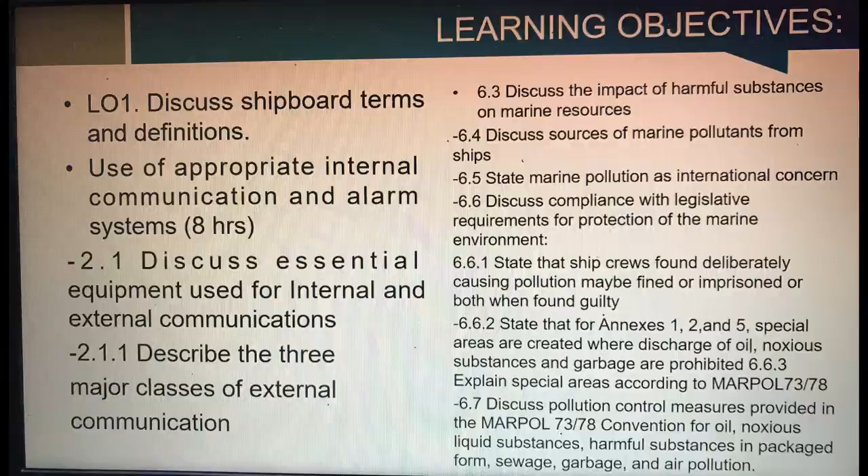Ship communication. First, what is communication? From Latin, communicare, meaning to share. Better sourcing needed: it is the act of developing meaning among entities or groups through the use of sufficiently mutually understood signs, symbols, and semiotic conventions.

In communication, it is where you share the message you decode, or the message you want to say, to the person you talk to.

Next, what is the process of communication? First, the formation of communicative motivation or reason. This is where you form your message into a word.

Then, message composition: further internal or technical elaboration on what exactly to express. This is what you form your word into a sentence.

Next, message encoding, for example into digital data, written text, speech, pictures, gestures, and so on.

Next is the transmission: transmission of the encoded message as a sequence of signals using a specific channel or medium. This is where you transmit the message, like giving it to the person you talk to. You transmit it to them.

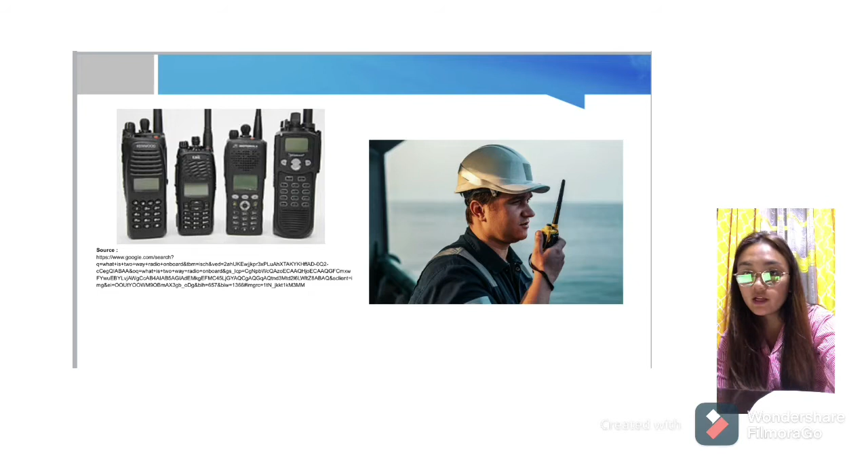Public address is applicable for all kinds of vessels, offshore, port, company, and schools as equipment for command communication, shout-out, general alarm, and entertainment, etc. For public address, when we say public, there are so many people around you. And address is you telling the people around you or surrounded by you the message you want to tell them. The public address system shall be a loudspeaker installation enabling the broadcast of messages into all spaces where crew members or passengers, or both, are normally present, and to muster stations.

It shall allow for the broadcast of messages from the navigation bridge and such other places on board the ship as the administration deems necessary, shall be installed with regard to acoustically marginal conditions and not require any actions from the addressee, and shall be protected against unauthorized use.

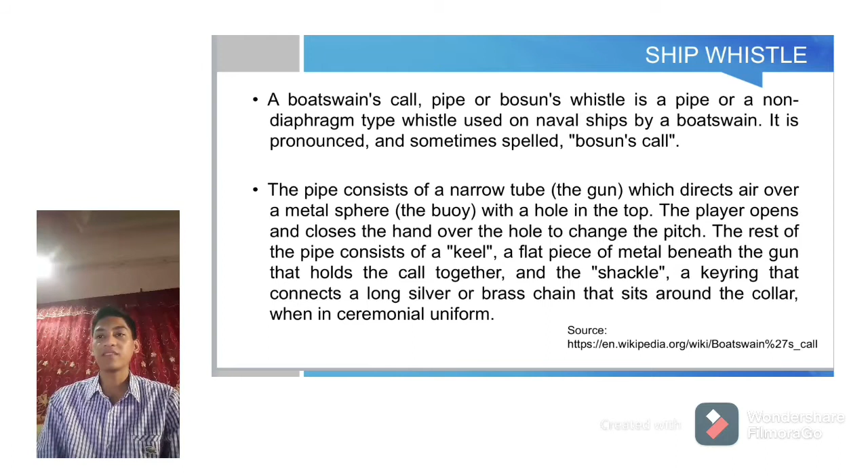Ship whistle is a boatswain's call, pipe or bosun's whistle, sometimes spelled as bosun's call. You can find this whistle at the front of the ship or vessel. Sometimes in the bridge, there's a pipe that the officers of the watch or the captains use, and they are the ones who sound the alarm using the pipe tube.

Aldis lamp or signal lamp, sometimes called a Morse lamp. In this equipment, they use Morse code to give messages, using the shutter of the mirror through light, and they transmit the message to the other vessel so that we do not misunderstand. Sometimes because of the radio call we can misunderstand the person, but with this Aldis lamp you cannot misunderstand the person as long as you know the Morse code message.

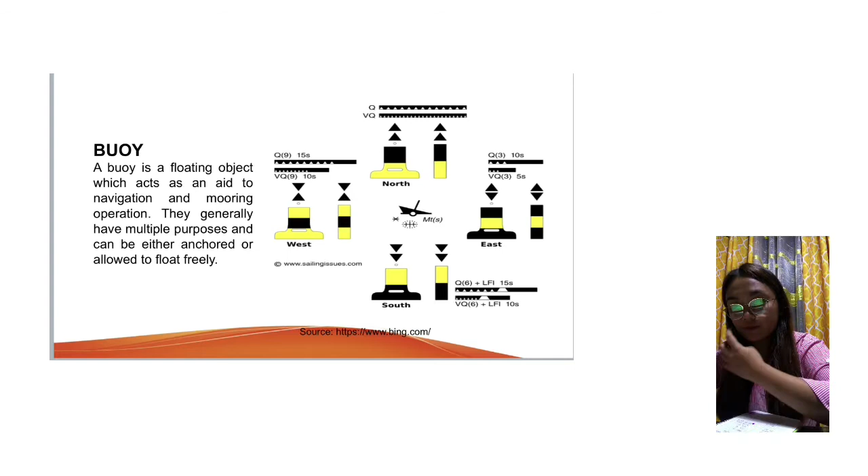Buoy. A buoy is a floating object which acts as an aid to navigation and mooring operations. They generally have multiple purposes and can be either anchored or allowed to float freely. This aid to navigation is very important because it gives us a sign of where we are or where we are going. It is also a warning sign, like a signboard, if an area is restricted for navigation. A buoy can be anchored or floating freely, and sometimes it is both anchored and floating freely at the same time - floating but not moving away from that place.

Course, the direction or planned path on which the vessel is proceeding. This course is where you are going, heading to your destination. It is the road map that you are going to navigate.

Correction. An error has been made in this transmission; the corrected version is in the correction. It is corrected by the captain, the officer of the watch, or the officer responsible for the situation. Correction is for them to be updated in terms of the chart, and in terms of correction, they have what they call notices to mariners.

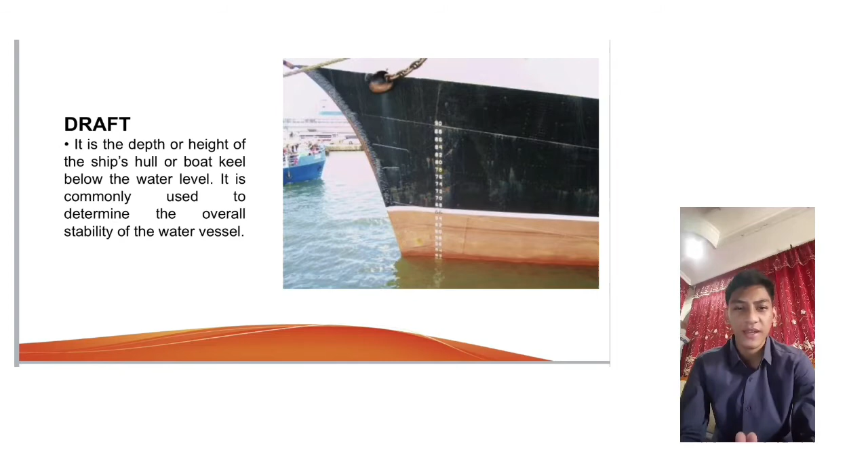Draft. It is the depth or height of the ship's hull or boat keel below the water level. It is commonly used to determine the overall stability of the vessel. It is for the officers responsible for the vessel to see what is the depth or height of the water.

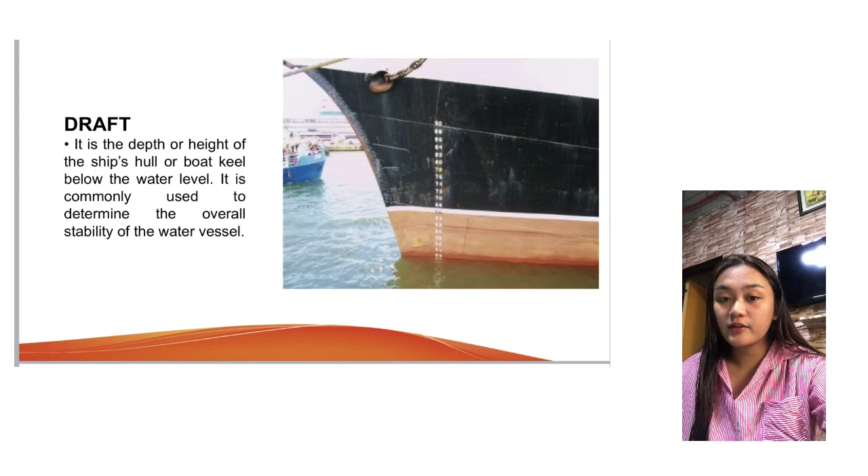Deep water route. A route within defined limits which has been accurately surveyed for clearance of sea bottom and submerged articles. Deep water route is important if you are navigating a ship, to prevent traffic or collision. It is a way that has deep water. For the deep water route, you can see it also on the navigating map - as an officer, you can check the map to see where the deep water route is.

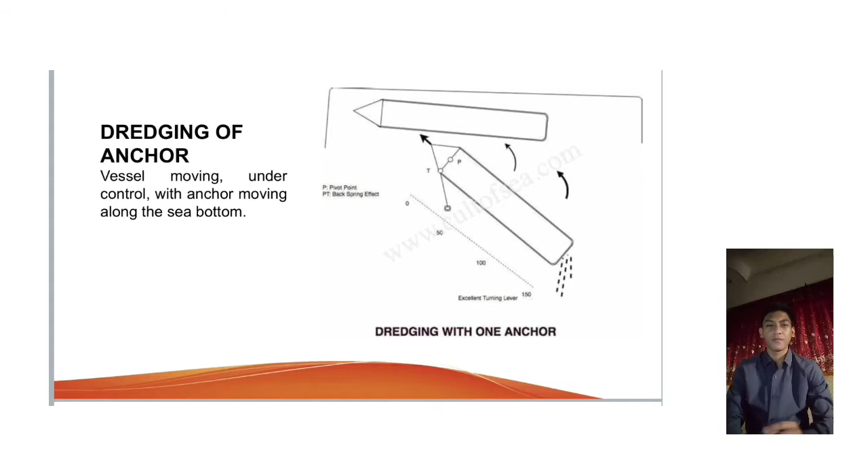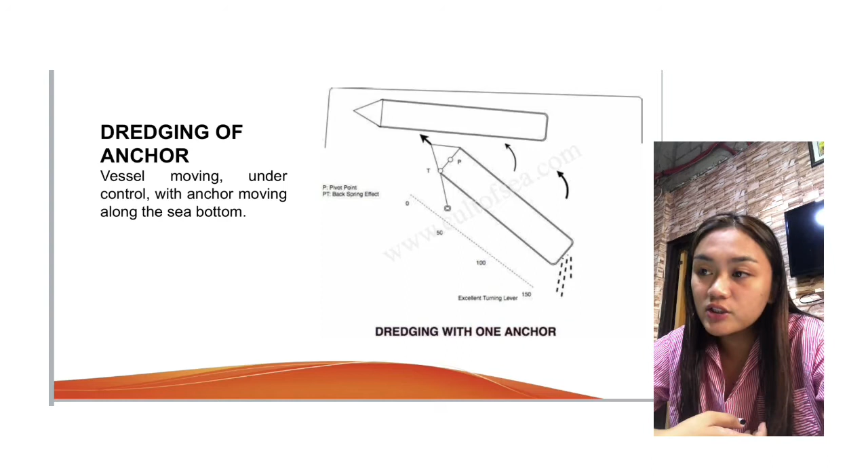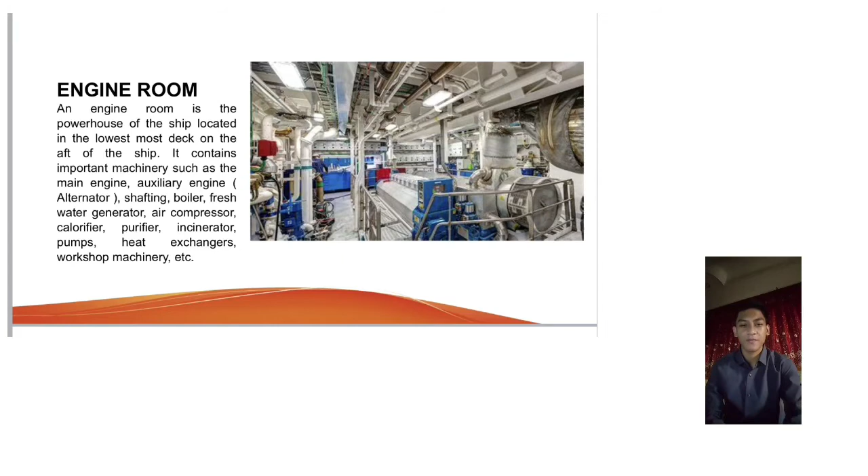Engine room. An engine room is the powerhouse of the ship located in the lowest-most deck on the aft of the ship. It contains important machinery such as the main engine, auxiliary engine or alternator, shafting, boiler, freshwater generator, air compressor, calorifier, purifier, incinerator, pumps, heat exchangers, workshop machinery, and etc. The engine room is very important for the vessel because it is where the vessel works and how the vessel works.

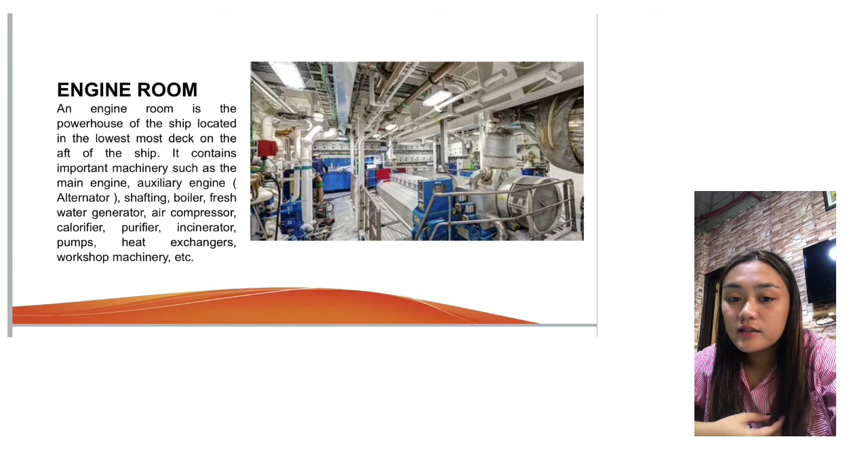ETD, or estimated time of departure, is the expected date of ship departure from port. ETA, or estimated time of arrival, is the expected date of the ship's entry into the port.

Flare, an emergency equipment used to signal other ships or nearby planes for rescue or help. This equipment is so important when it comes to search and rescue operations. You can easily notify the ships or the rescuer using the flare.

Fouled propeller: a line, wire, net, etc. is wound around the propeller. This situation may cause harm on the ship or may cause accident on the crew on it.

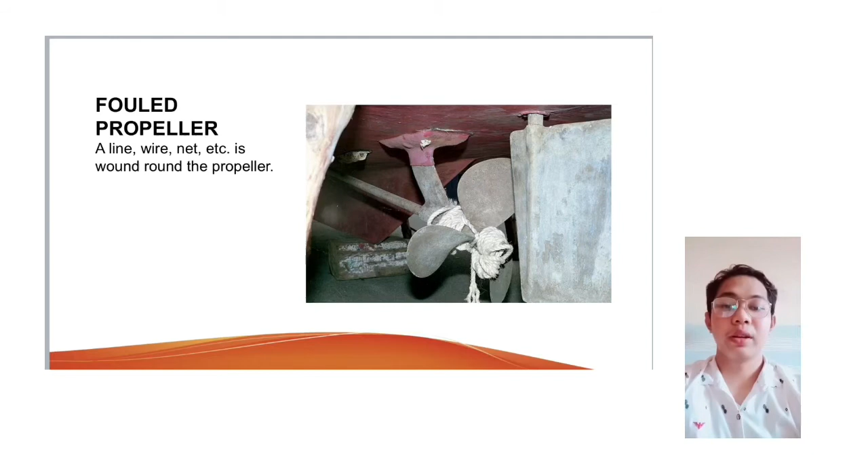Fouled anchor: the anchor has its own cable twisted around it or has fouled on an obstruction. Same as fouled propeller, it is dangerous because it may also cause an accident, so always check your anchor and propeller.

Fairway speed: the mandatory speed in a fairway. We have rules at sea. When we are in a fairway, we must obey the given speed of a vessel.

Grounding: a phenomenon when a ship or boat's keel touches the ground or seabed. When we encounter a grounding situation, we must be alert because it may cause negative results like flooding that can cause your death.

GMDSS, or Global Maritime Distress and Safety System, is an automated ship-to-shore system using satellites and digital selective calling technology. This is very important when it comes to search and rescue operations because this equipment can send distress signals to shore and can locate your location.

Helmsman: the person responsible for steering the ship or a large boat is called the helmsman. The helmsman is one of the members of the bridge team and is very important when navigating the ship or in a navigational operation.

Keel: the bottommost central part of the ship or boat hull on which the entire structure of the ship is built upon. The keel is very important because it prevents the boat or ship from being blown sideways by the wind.

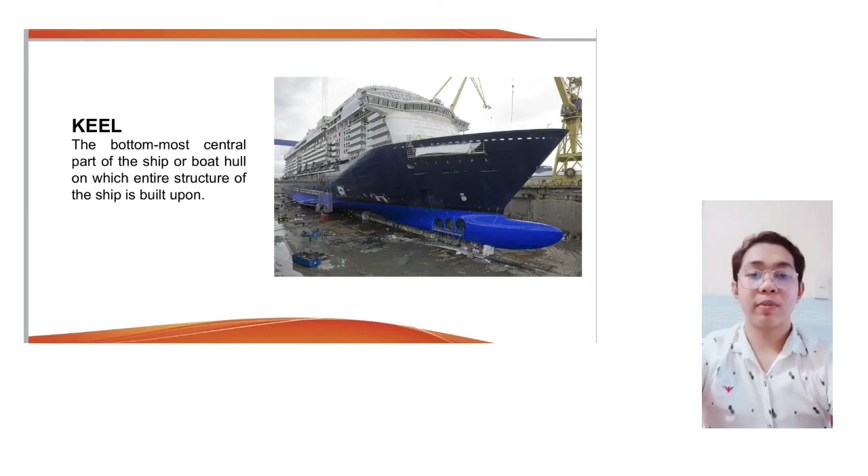Capsize: a situation in which a ship or boat rolls over or tilts too far, exposing the keel. In simple words, your boat or ship is said to capsize when it is turned upside down. Much larger ships and boats break apart and sink under this condition, so many times it's also referred to as sinking of a ship.

Capsizing or keeling over occurs when a boat or ship is turned on its side or is upside down in the water. If a capsized vessel has enough flotation to prevent sinking, it may recover on its own in changing conditions or through mechanical work if it is not stable while inverted.

Sextant: a navigation instrument used by a seaman to locate their vessel's position at sea, based on the position of the sun, stars, and moon in the sky. In old times, it was used as the only means of navigation at sea, but nowadays it's used only as a backup navigation tool or in an emergency.

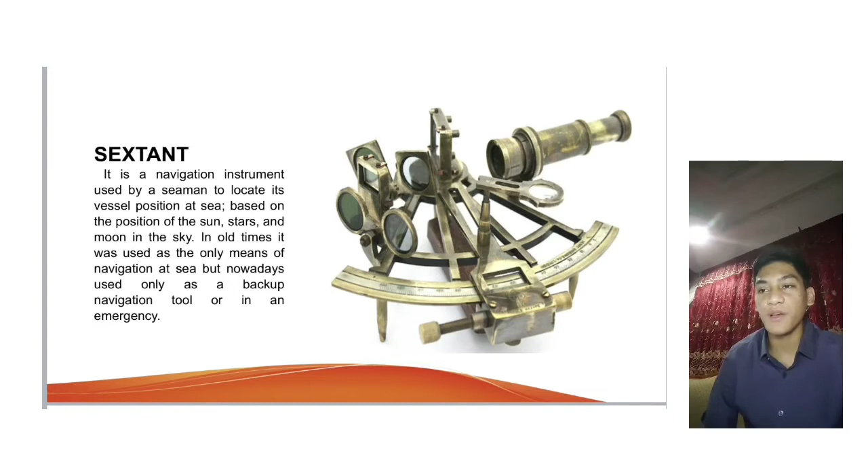EPIRB stands for Emergency Position Indicating Radio Beacon, which sends radio signals once activated to alert and inform ships, satellites, and airplanes of the ship or boat's position. It is much like an emergency location beacon which will inform search parties of your actual position. So an EPIRB is a safety device carried by a vessel to alert search and rescue services, allowing them to quickly locate you in the event of an emergency. When activated, it transmits a coded message on the 406 MHz distress frequency, which is monitored by COSPAS-SARSAT, a satellite system.

Two-way route: a route within defined limits inside which two-way traffic is established, aimed at providing safe passage of ships through waters where navigation is difficult or dangerous.

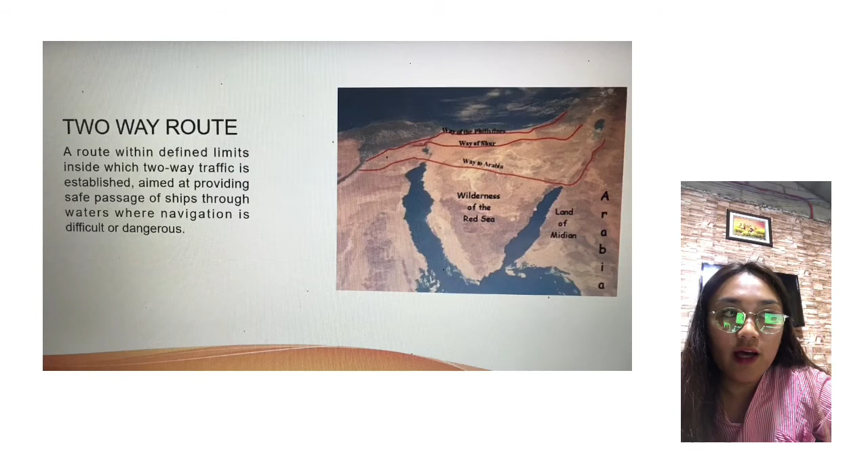A two-way route is similar on land. We have this on the right side and on the left. We have four lanes, for outgoing and ingoing traffic. On the right side is for the tricycles and on the left side is for the four-wheeled vehicles. Same at sea, we have a two-way route, which is on the right side; this is the safest for emergencies. And if the left side has a situation that can cause harm to the vessel, we use the right side to move away.

Vessel leaving, a vessel which is in the process of leaving a berth or anchorage. Vessel leaving is similar to estimated time of departure, because in vessel leaving, it's the vessel that is leaving, and for estimated time of departure, this is the expected time of their leaving.

Vessel leaving is not only for the port but also when the vessel is at anchorage. Vessel outward, a vessel which is proceeding from harbor or anchorage to seawards.

If we have leaving, we also have arriving. It's like ETA, estimated time of arrival, which is when they arrive at port.

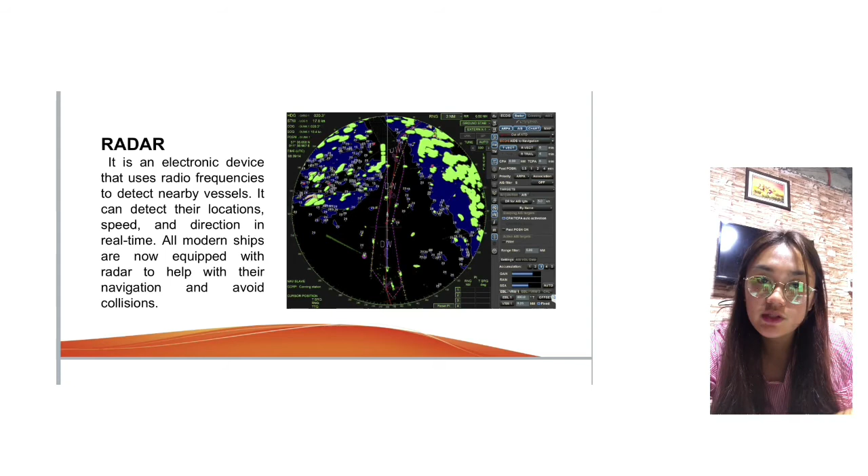Environmental protection, basic environmental procedures. Our learning objective for this session is knowing the impact of maritime pollution on the environment, knowing what harmful substances are according to MARPOL, the impact of harmful substances on marine resources, and discussing the source of marine pollution from ships.

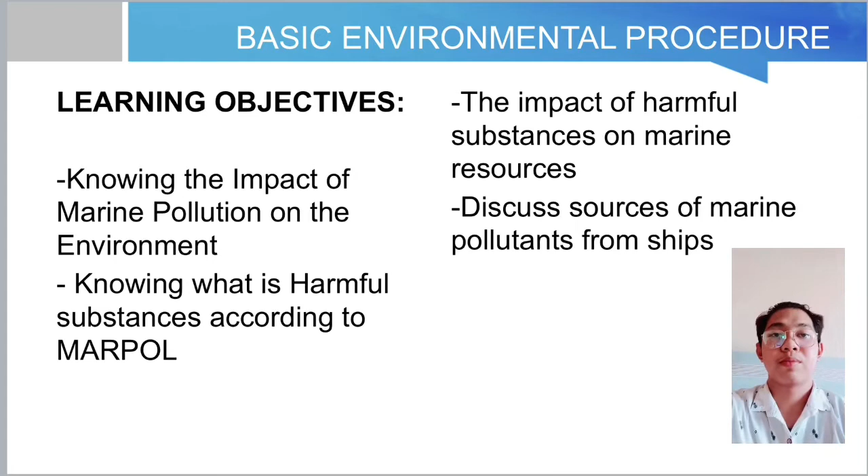What is marine pollution? Marine pollution is a combination of chemicals and trash, most of which comes from land sources and is washed or blown into the ocean. As a responsible seafarer, we must remind others not to throw their garbage into the sea because it may harm the marine environment. Wildlife entanglement.

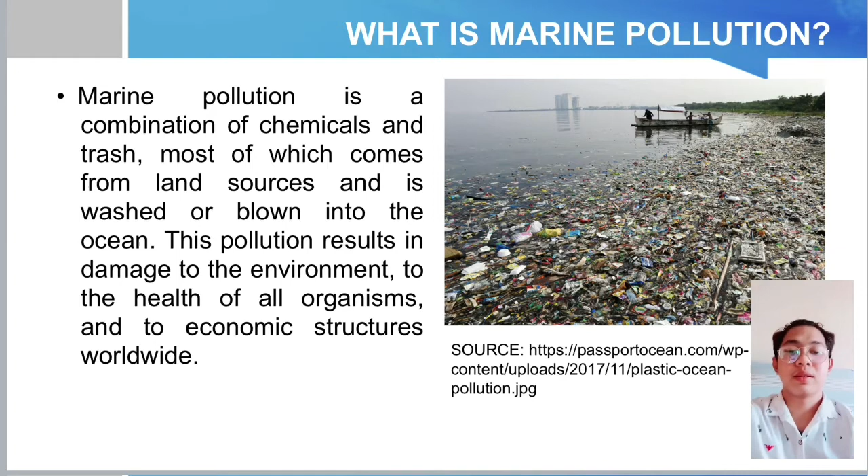Marine wildlife death by entanglement is a silent killer. Thousands of miles and literally tons of derelict rope and fishing nets quietly snare unsuspecting marine animals on a global scale every day. Being a fisherman, we must avoid losing our equipment like nets because it may also harm fish and marine animals.

So we must prevent this from happening and be responsible. Many marine animals are dying because of this. It is estimated that over 100,000 marine animals such as turtles, dolphins, seals, and whales die each year from ingesting or becoming entangled in plastic debris.

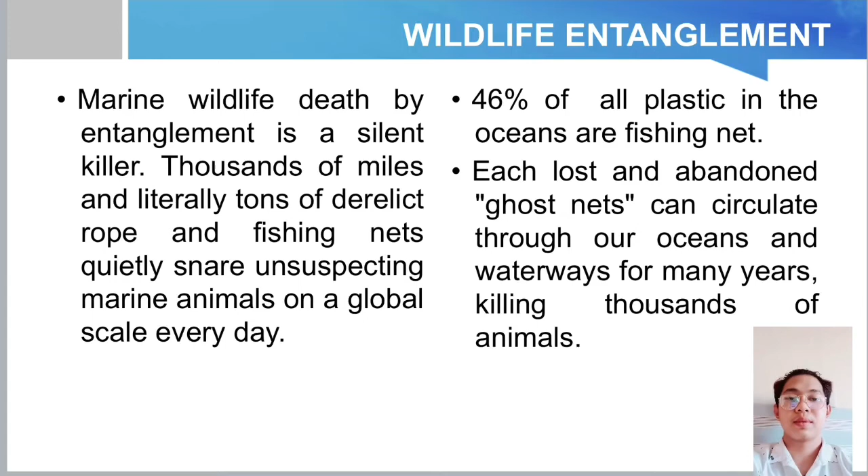Wildlife ingestion: 52% of all sea turtles worldwide have eaten plastic. By 2050, 99% of seabirds are likely to have ingested plastic. For years, many people have been dumping their garbage in the ocean, which is not good because many marine animals can eat the garbage, or the plastic in the garbage can affect the marine environment.

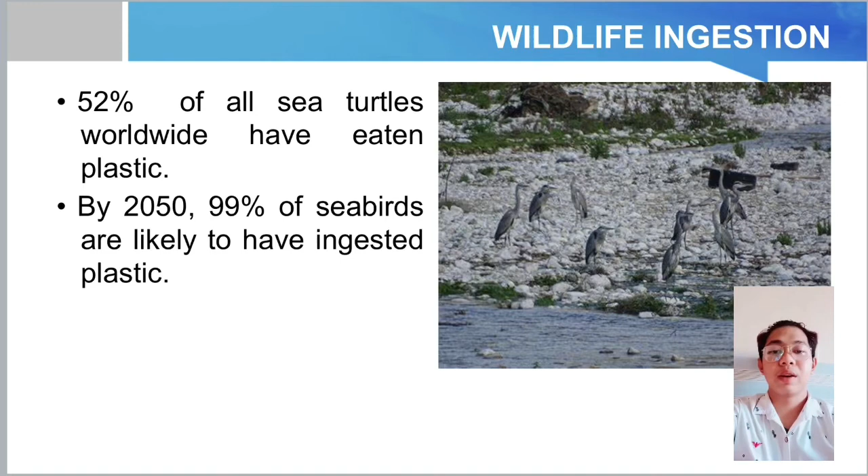Economic loss: vessel damage and navigational hazard. As a responsible seafarer and officer on the watch, we must avoid collisions, because when a collision happens, our vessel may be drowned in the ocean, and it may also cause hazard in the marine environment.

Economic loss in the marine industry: there are many irresponsible seafarers who throw their trash or garbage into the ocean, leading to marine pollution. We have MARPOL, and we must obey its orders and rules so that we can protect our marine environment.

Economic loss in tourism: the annual loss in tourism caused by marine litter is estimated to be USD 600 million. Many tourism spots are affected by marine pollution, and many workers are affected as well.

MARPOL Annex 3, harmful substances carried at sea in package form. Annex 3 of MARPOL 73/78 covers harmful substances carried at sea in package form. This annex came into force internationally on 1 July 1992. It contains regulations including requirements on packaging, marking, labeling, documentation, stowage, and quantity limitations.

This MARPOL annex is very useful when it comes to protecting the marine environment because it prevents goods from being drowned in the water by requiring proper packaging. It also makes it safe for goods to be delivered to every country because we use these regulations.

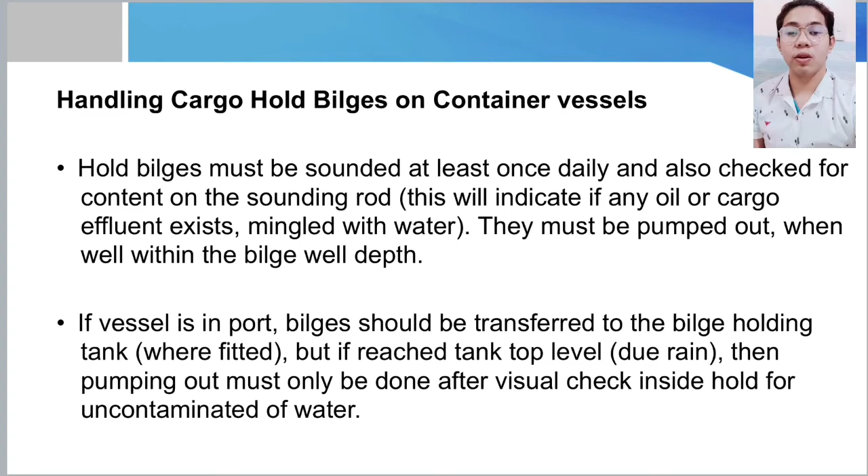Handling cargo hold bilges on container vessels: hold bilges must be sounded at least once daily and checked for content on the sounding rod. This will indicate if any oil or cargo effluent is mingled with water. They must be pumped out when well within the bilge well depth. Bilges can also cause pollution in the marine environment through oil spills or oil mingled with water, so they must be sounded and checked every day to prevent pollution of the marine environment.

Handling bilges from other spaces, non-engine room: bilges need to be occasionally pumped from other spaces like boatswain's store, void spaces, cofferdams, steering flat, under-deck passages, and so on. In all such cases, they must only be pumped out at sea after confirmation of contents.

Bilge pumps are a type of marine water pump found on both large and small ships. They are responsible for removing water accumulated in bilge wells and discharging it overboard. It's impossible to stop water and oil from collecting in bilge wells. On vessels of virtually any size, the bilge pump performs a very important function to remove accumulated water by creating pressure or suction so that the water can be removed.

Handling of harmful packaged goods: if any marine pollutant, as per IMDG, leaks from a container into the hold bilges or on deck, it must be collected taking due precautions, and as per EMS, disposed of ashore. Accidental loss overboard of containers must be notified to shore authorities, also mentioning the nature of contents, especially if they are marine pollutants.

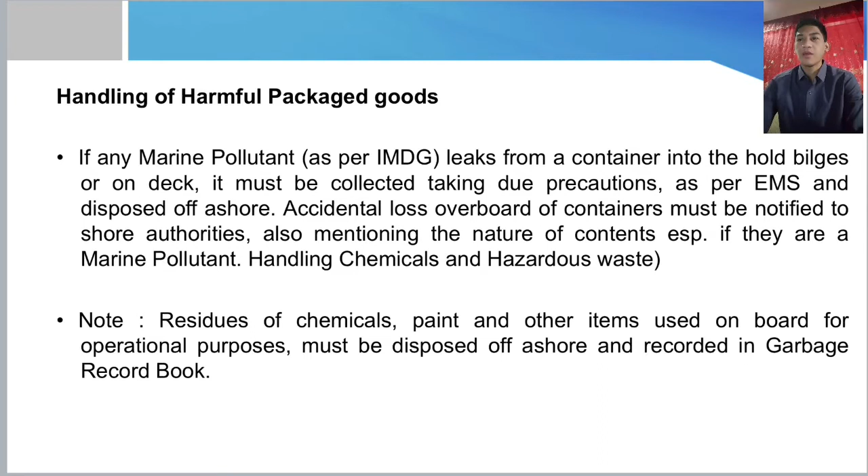Handling chemicals and hazardous waste: residues of chemicals, paint, and other items used on board for operational purposes must be disposed of ashore and recorded in the garbage record book. We also need to mention the nature of the contents if they are marine pollutants, to inform authorities, and ensure disposal ashore is recorded in the garbage record book as evidence and to know the time of disposal.

Disposable cargo: crew members should remember that cargo hold wash water from holds containing cargoes harmful to the marine environment can only be discharged provided the master determines there are no adequate reception facilities at the receiving terminal, and the ship is en route and as far as practicable from the nearest land, but not less than 12 nautical miles. Before washing, dry cargo residue should be removed and bagged for discharge ashore as far as practicable, holds should be swept, and the volume of wash water used should be kept to a minimum.

Filters should be used in the bilge wells to collect any remaining solid particles and minimize solid residue discharge. Lastly, the discharge should be recorded in the garbage record book, and the port state notified utilizing the revised consolidated format for reporting alleged inadequacy of port reception facilities.

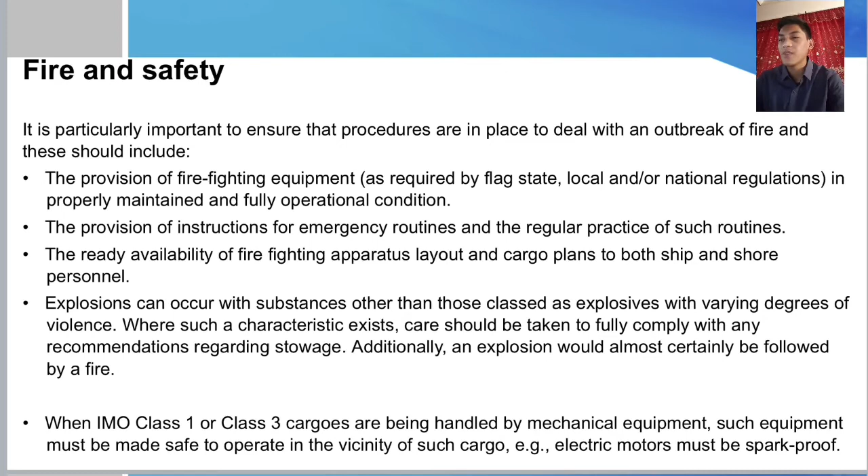When IMO Class 1 or Class 3 cargoes are being handled by mechanical equipment, such equipment must be made safe to operate in the vicinity of such cargo, and electric motors must be spark-proof. This procedure is important on board to solve problems immediately and properly, and to make sure our crew stays safe.

Harmful substances affect all marine organisms. Tens of thousands of chemicals are used in modern society, but information about their concentration in the marine environment is only available for some chemicals. There is even less information about the environmental impact of chemicals.

Nevertheless, environmental impacts play a crucial role in considering the importance of such substances to the marine environment. The concentration of harmful substances is measured in water, sediments, and organisms. Monitoring of harmful substances in the Baltic Sea has traditionally focused on assessing concentrations of harmful substances in water, the seabed, and organisms.

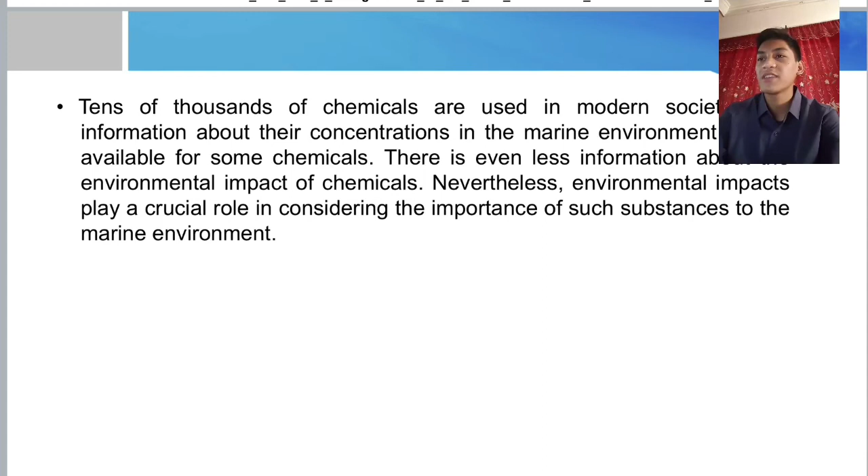Statements of the effects of harmful substances on the biota of the Baltic Sea are mainly based on individual research projects. Thus, much of the actual effects of chemicals on biotic communities and ecosystems remain completely unknown. Besides, the interactions between different substances on marine organisms are also not sufficiently known.

The effect of harmful substances is based on many different factors. The effect of toxic substances on biota is the result of a variety of processes. They depend on the physicochemical properties and concentration of the substances, environmental factors such as pH and oxygen content, as well as the biology of the organism.

In the marine environment, organisms are almost invariably exposed to mixtures of different compounds, not just individual toxins. Such exposure and its effect can be observed at many different levels, such as molecular, cellular, tissue, individual, population, and community.

Sea eagles suffered from exposure to insecticide. From the 1960s to 1980s, the population of white-tailed sea eagle, Haliaeetus albicilla, in the Baltic Sea suffered from accumulation of organochlorine compounds. The commonly used insecticide dichlorodiphenyltrichloroethane, or DDT, accumulated in birds. It caused eggshells to become too thin and chick production collapsed.

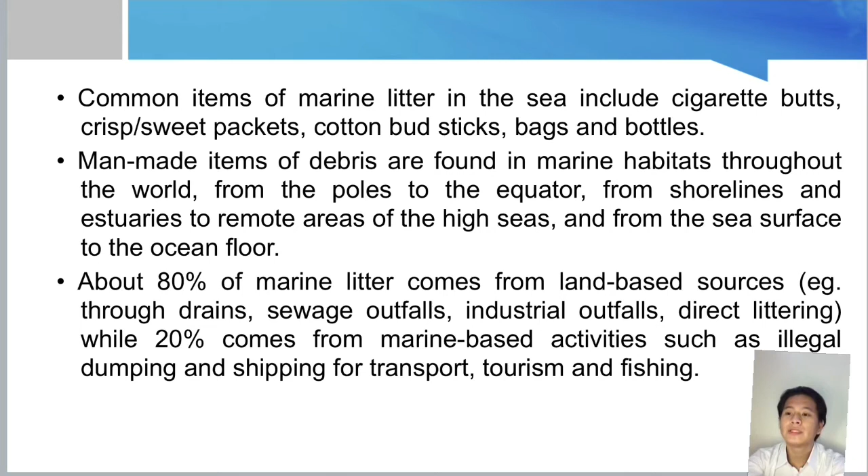The amount projected by 2050 on current trends is about 40 billion tons, which is enough to wrap 60 layers of plastic wrap around the planet.

Compliance with legislative requirements for protection of the marine environment. General guidance for marine environment protection: the shipping industry recognizes environmental protection as one of its highest priorities, and every effort should be made to conserve and protect the environment from marine, atmospheric, and other forms of pollution.

Environmental policy aims to eliminate the possibility of pollution at source by ensuring that high standards of safety and awareness are maintained, and that all relevant legislation and conventions are followed. Concerned parties are to be committed to the continuous improvement of procedures for achieving zero spills.

An environmental management system, or EMS, is a structure designed to implement this and establish an effective environmental policy. The shipboard EMS team is to be made responsible for identifying and monitoring any specific legal, regulatory, and other relevant requirements and guidelines about the environmental program.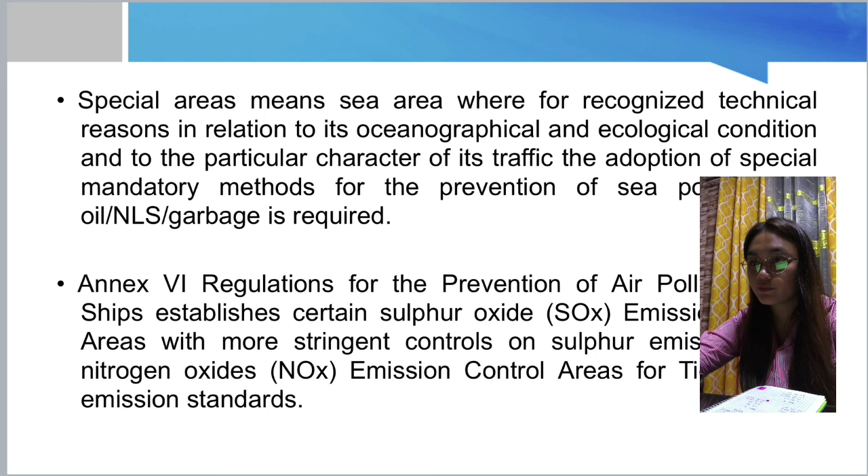For Annex 1, the following are special areas: the Mediterranean Sea area, the Baltic Sea area, the Black Sea area, the Red Sea area, the Gulf area, the Gulf of Aden area, the Antarctic area, the Northwest European waters, the Oman area of the Arabian Sea, and Southern South African waters.

Annex 1 covers Regulations for the Prevention of Pollution by Oil. The special area for Annex 2, Regulations for the Control of Pollution by Noxious Liquid Substances in Bulk, is the Antarctic Sea area.

For Annex 4, Prevention of Pollution by Sewage from Ships, the special area is the Baltic Sea area.

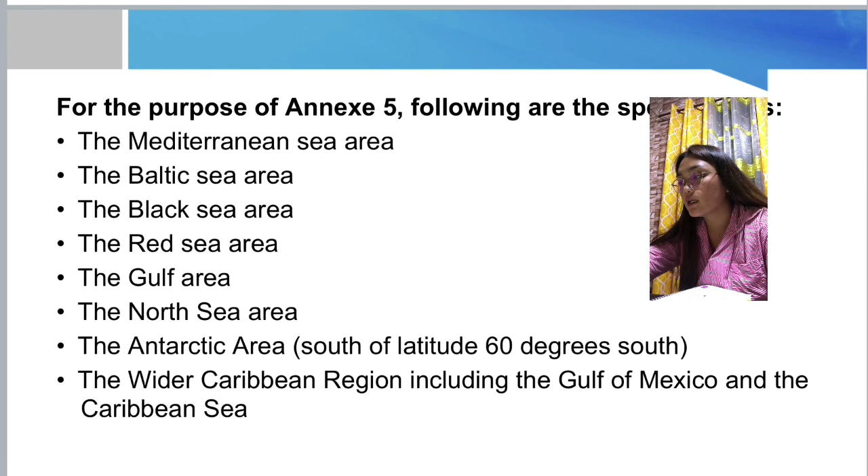For Annex 5, Prevention of Pollution by Garbage from Ships, the special areas are the Mediterranean Sea area, the Baltic Sea area, the Black Sea area, the Red Sea area, the Gulf area, the North Sea area, the Antarctic area south of latitude 60 degrees south, and the wider Caribbean region, including the Gulf of Mexico and Caribbean Sea.

For Annex 6, Prevention of Air Pollution from Ships, the special areas are the Baltic Sea area, North Sea, North American ECA, and United States Caribbean Sea ECA.